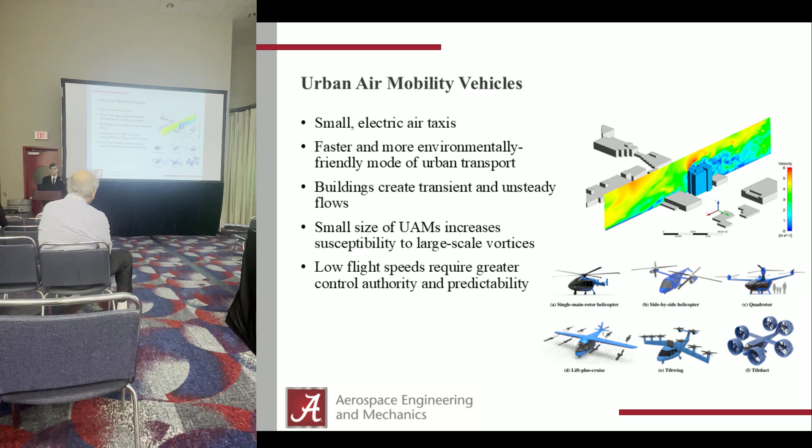So some of the previous research that has been done in this field has studied the movement of vortices through the propeller plane, in which it's been noted that they move radially inward and in the circumferential direction of propeller rotation. In addition, it has been noted that the tangential velocity component of vortices has the largest impact on propeller performance.

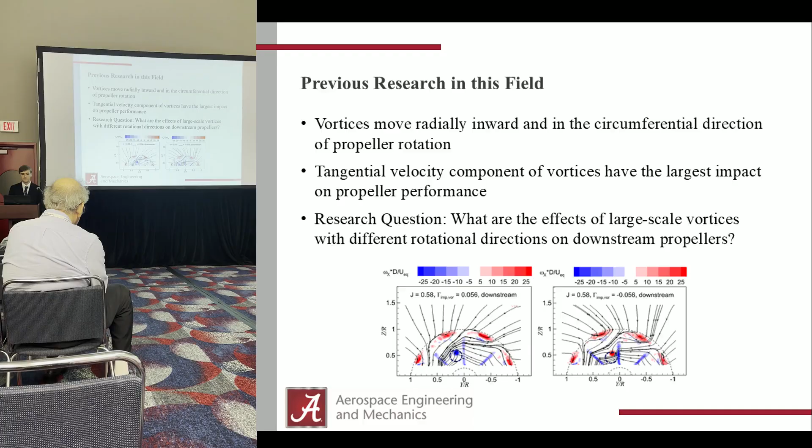So this led to the hole in our research that our research question hoped to answer: what are the effects of large-scale vortices with different rotational directions on downstream propellers? And we were hoping to get some experimental data to study this. So our hypothesis was that a counter-rotating vortex, or one that moves in the opposite direction of propeller rotation, would create an increase in both thrust and torque, and that a co-rotating vortex would have the opposite effect.

Using the simple coefficient of lift and drag equations, we can see that coefficient of lift and coefficient of drag are all going to be based on your propeller geometry. Your changes in density are going to be relatively small at the low speeds in which we were testing. So we would expect that with an increase in velocity, we would also see an increase in lift and drag on the propeller.

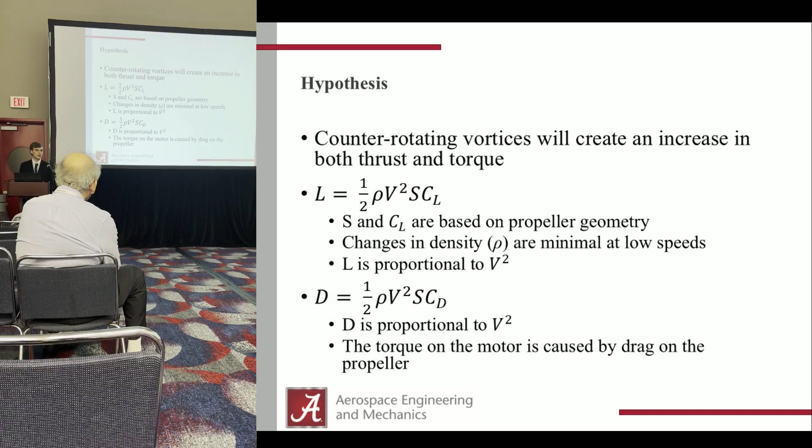So here are two schematics of our experimental setup. We had a hotwire anemometer mounted on a 2D traverse. We had a load cell in between our motor and our motor stand. And then in front of all of that, we had a 6-inch chord NACA 0018 airfoil that we used to generate a tip vortex. And by changing the orientation of this wing, we could get different rotational directions.

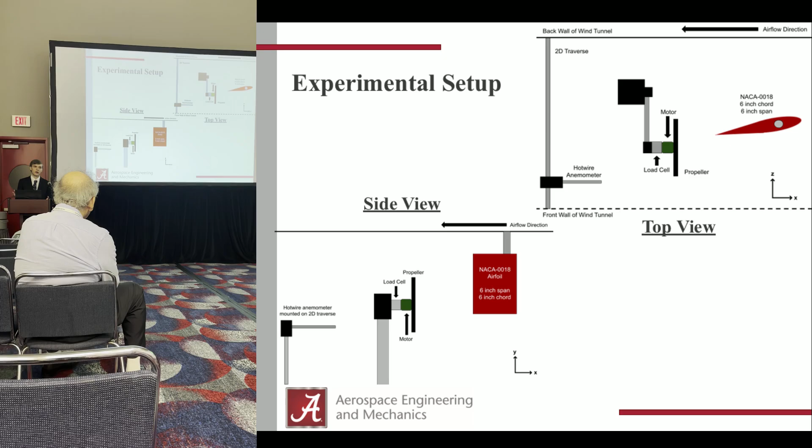So in order to cut down on time doing our initial surveys to find where the vortex was located, we used SolidWorks FlowSim, and we found that it did actually provide relatively accurate data for the size and location of our vortex.

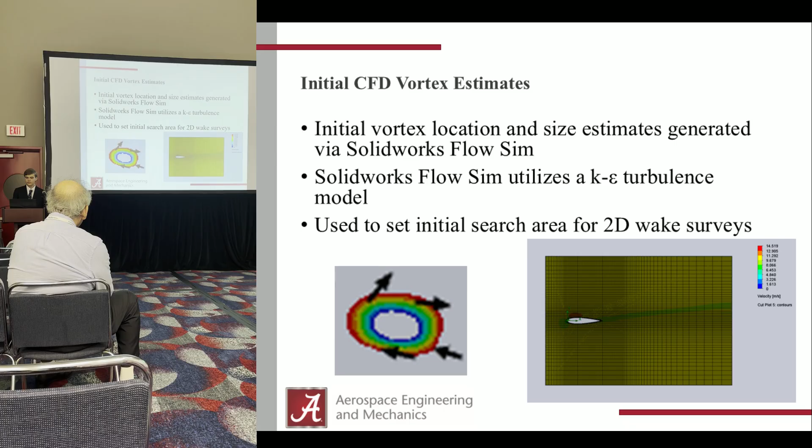So to experimentally get the data for where our vortex was located, in our subsonic closed circuit wind tunnel, we used the 2D traverse with the hotwire to locate the tip vortex generated by the NACA 0018 wing. And we used this plot on the bottom left where we took it at multiple streamwise locations in order to figure out where we had the most coherent vortex. And then after we decided where the most coherent vortex was, we used the top right plot in order to figure out where the center of the vortex was located.

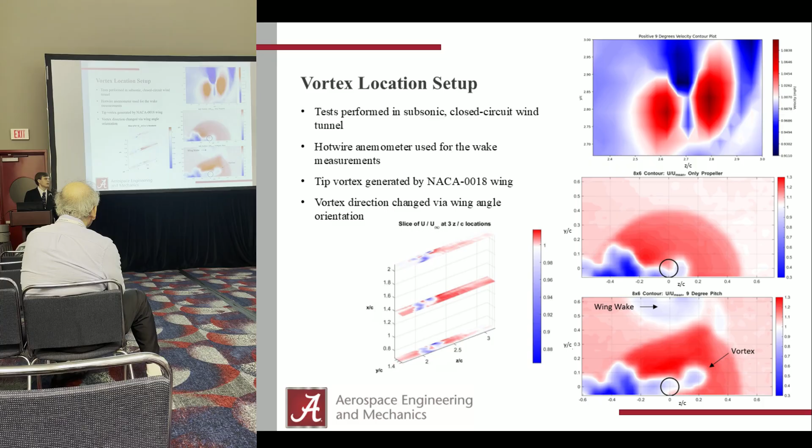And as can be seen on these bottom two plots, this is after we put the propeller in the wind tunnel. We can see that the vortex is slightly to the right of the motor. So we have relatively good accuracy of predicting where the center of the vortex will be.

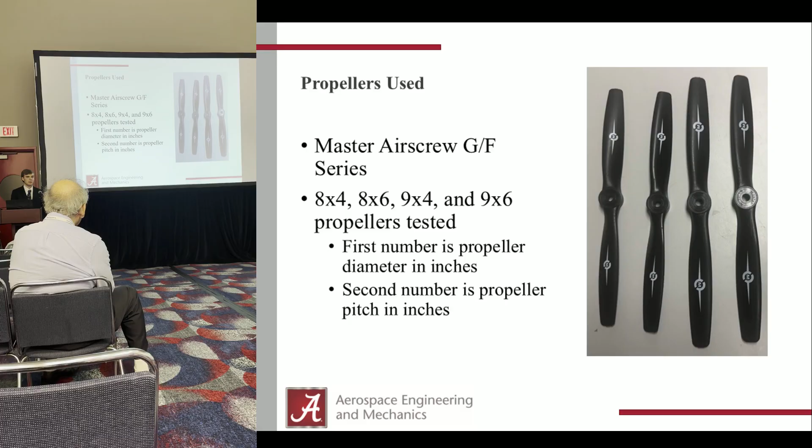For the purposes of our testing, we used 8x4, 8x6, 9x4, and 9x6 propellers, and this allowed us to control for both the diameter and the pitch of the propeller. In this case, the first number is your propeller diameter in inches, and the second number is your propeller pitch in inches.

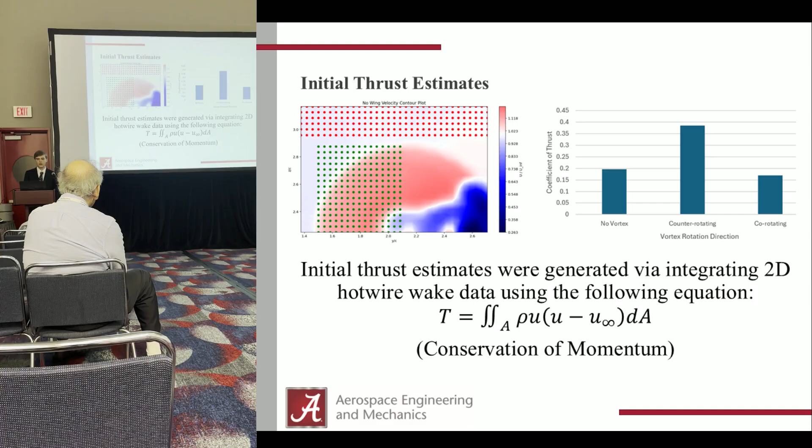So for our experimental procedure, we started by setting the wing angle and propeller stand location. We used a speed of 22.2 miles an hour, which roughly corresponds to 10 meters per second. For the first data set, we would set the propeller to the minimum possible rotational frequency where it wasn't just windmilling. And then after that, we would take 20 force and torque data points in 3 dimensions, and we would then increase the rotational frequency by 500 RPM as measured by a photodiode. And we would repeat steps 4 and 5 until 2 or 3 points passed where the thrust reversed.

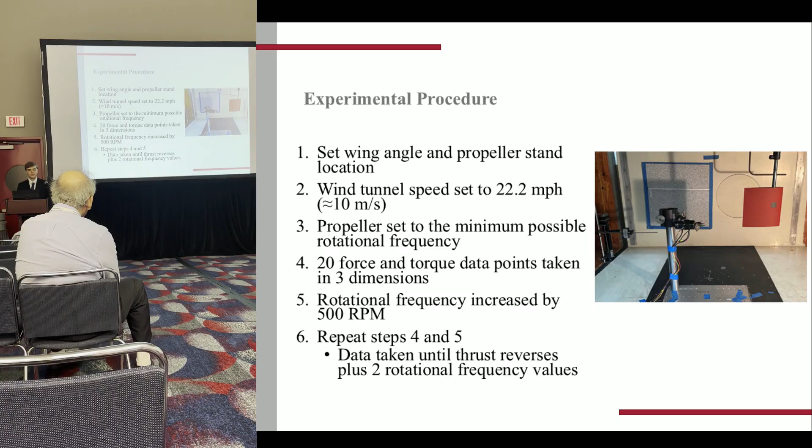So for our data on all of these plots, I'm going to have the advance ratio on the x-axis and the coefficient of thrust or coefficient of torque on the y-axis. So we did find that, in fact, the counter-rotating vortex did indeed increase both the thrust and torque applied to the motor, while the co-rotating vortex decreased the thrust and torque applied to the motor.

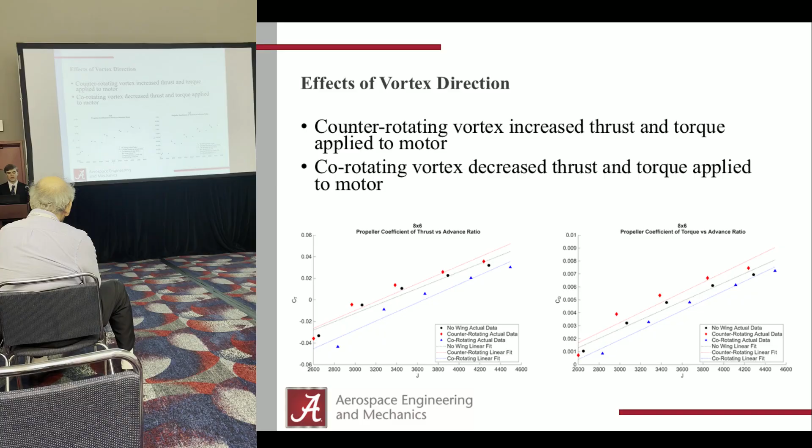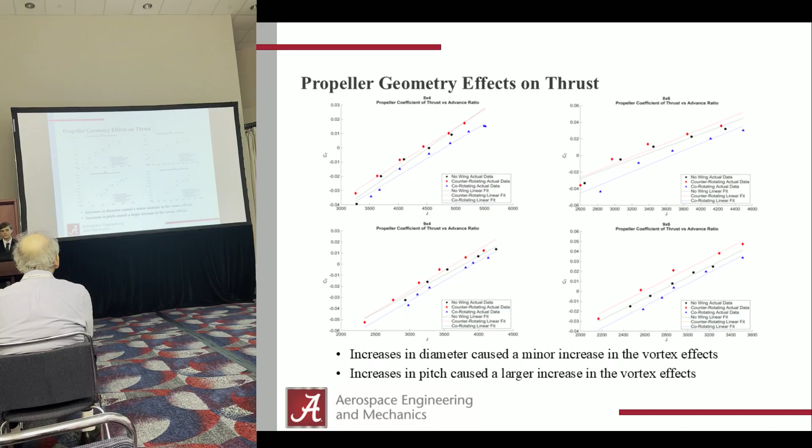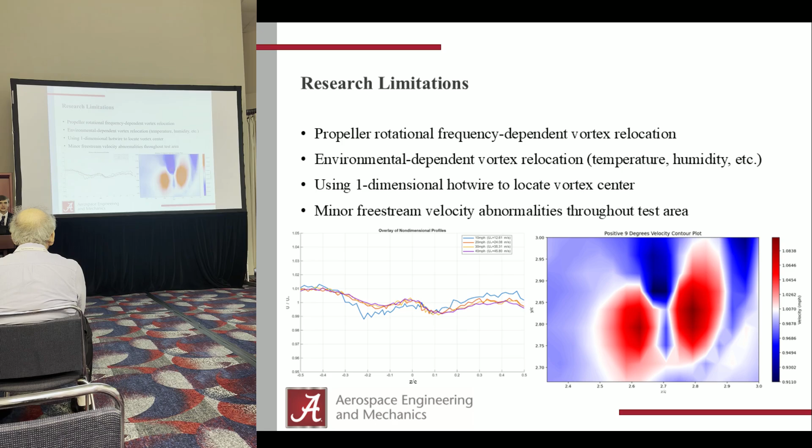Now, there are some limitations to our research I'd like to acknowledge. For instance, based on environmental factors or the rotational frequency of the propeller, there was some relocation of the vortex. However, we have reason to believe it did hit the propeller in every case. There's also some uncertainty in the y-axis, as can be seen in this right plot, due to the fact that we used a one-dimensional hotwire. Finally, there were some minor free stream velocity abnormalities throughout the test area of our wind tunnel, which can be seen in the bottom left. However, these never got above 1% of the free stream velocity.

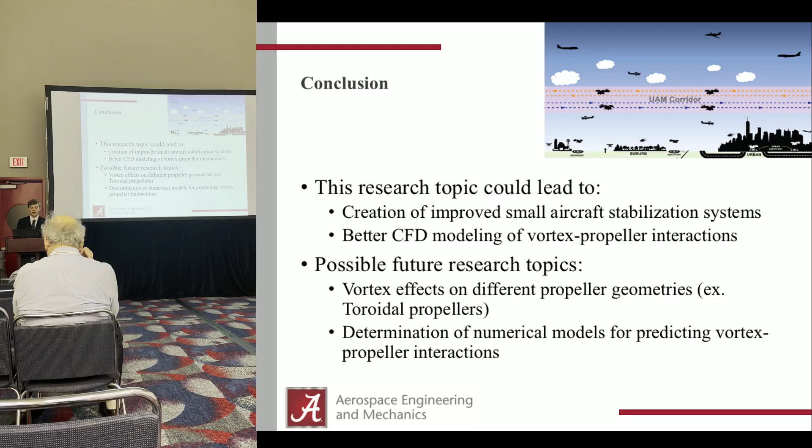In conclusion, it is my hope that this research could lead to the creation of improved small aircraft stabilization systems, and the data points could be used as a comparison for CFD modeling. Finally, some ways this research could be extended in the future would be to determine if these effects are the same on some alternative propeller geometries, for example, toroidal propellers, or the determination of numerical models for predicting vortex-propeller interactions.

What was the reasoning for the selection of the size of propellers? It was mostly based on what we already had, and like I said, we wanted to pick 2 propellers with the same pitch and 2 propellers with the same diameter at least. But other than that, it was based on what we already had at the university.

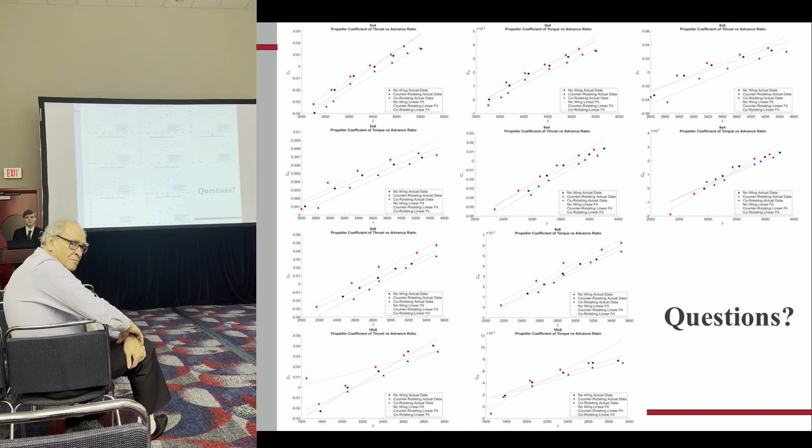You mentioned that increasing the pitch had a greater effect on the vortices. Do you attribute that to greater separation, or what mechanism do you attribute that to? Were you referring to the torque or thrust data sets? Right. We have not done enough research because we only had 1 semester to do this research, but I would like to in the future possibly continue this research to study what is the actual cause of this increase. Any other questions?